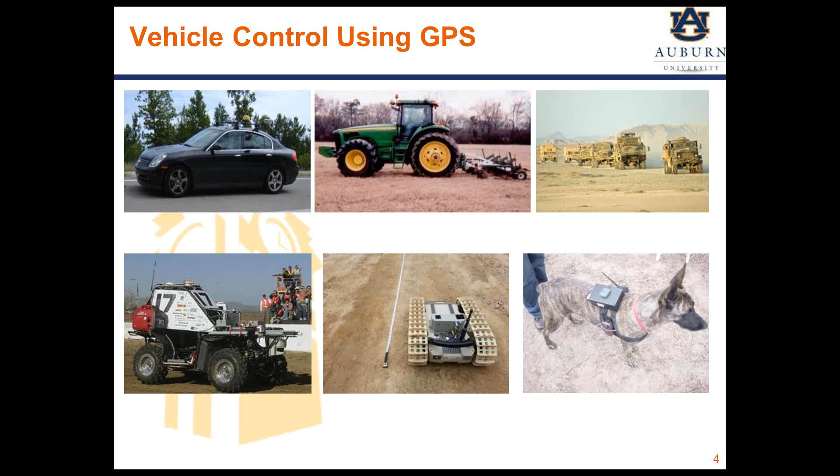And then, of course, the question is, what's the next vehicle we're going to work on? And so we've actually, in the past, and this has been getting a lot of publicity lately, done work with an autonomous canine. So the vet school trained a canine to be able to listen to commands, and we basically put a GPS receiver pack and a smart controller that we program to be able to send the dog to waypoints. So you can imagine things like border security or search and rescue or searching an area remotely without an operator. You could use a device like this.

So one of the other things that I'm really proud about our group is we don't do research just for doing research. We are in an academic setting, but we're a very, very applied lab, and so really proud about the fact that a lot of our work gets integrated into systems. So when we were working with the FCS folks, a lot of our algorithms were being integrated into the autonomous navigation software with GDRS. Some of those algorithms now are being integrated into Lockheed Martin, into what was called the CAST program. It's now AMAS. And so they've taken our software and integrated it into their platforms.

Some of our vehicle modeling has made it into different simulation environments. Deere is currently testing our control algorithms and basically forcing us to write them in a way that they can integrate them easily into their vehicles at future points. And even work that we've done with OEMs like Ford, they've basically taken our algorithms and at least tested them, so they're not necessarily inserted in current production vehicles, but they have tested them on their own vehicles.

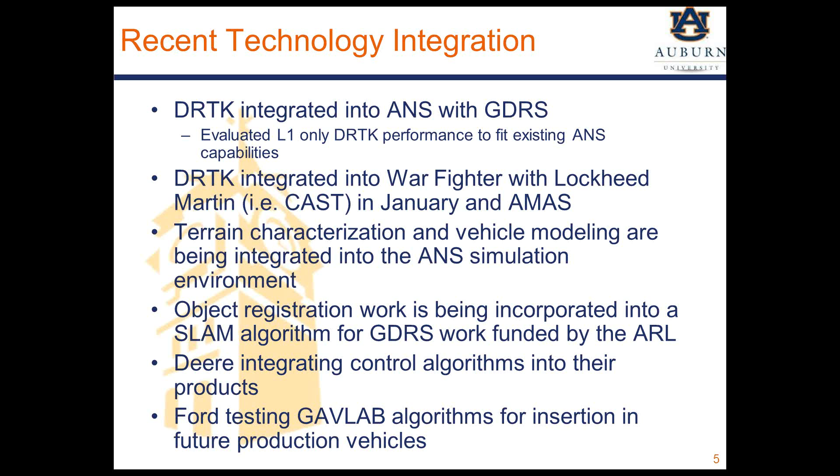Some of the resources in our lab: we have a variety of different GPS receivers, including standard hardware GPS receivers, but we also have a lot of specialized software receivers. So we have a NordNav IF recorder and software receiver that lets us record L1 IF data. We can record that data and replay it through the receiver. We can replay it through our own. We have our own C and MATLAB software receiver algorithms that we can play that IF data through. We're also building up our own FPGA-based IF and IMU recorders so that the IMU and IF data is time synced.

And then we've developed some FPGA reprogrammable GPS receivers and we're in the process of moving those to real time. And so that allows us to collect IF data, develop new tracking algorithms, and see how they perform in different environments, such as noisy environments. We're supposed to go out in 2 weeks to White Sands for what's called NavFest to collect data in different jamming environments. That currently is on hold due to the current government situation, so it may be rescheduled till December. But we'll take these IF recorders, record data in those environments, process that data and see if we can develop algorithms that can improve their performance in various scenarios.

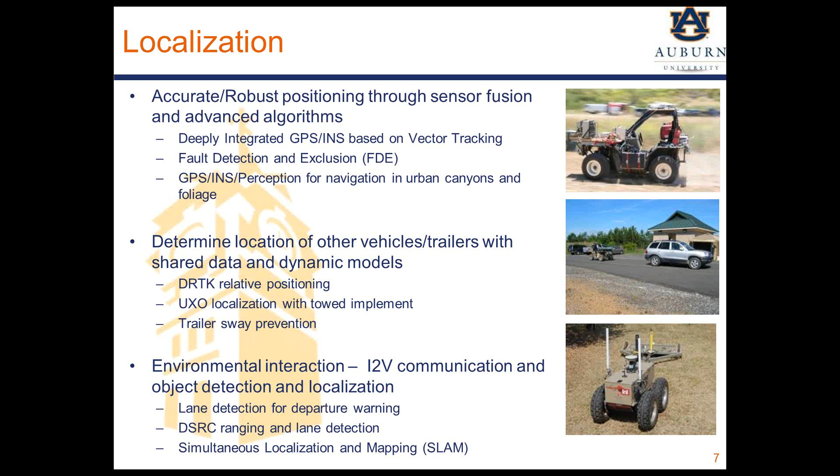And then even some environmental localization, such as simultaneous localization and mapping, where you're looking for objects, mapping those objects, and then navigating off of those objects. So this is work that we're doing for GPS denied or GPS harsh or GPS limited environments.

So one of the things that we're developing in the lab is what we call a GPS simulator. So on the market you can buy RF simulators. This is not an RF simulator at present. It's what we call a GPS simulator because it simulates GPS outputs. So instead of providing RF outputs, it provides NMEA messages or range and pseudo-range measurements, just like a receiver would be. And so we use it in the lab for several of our programs where we want to basically simulate a different receiver that's hooked up to a module.

And so within that, we have realistic acquisition times. We have noise values. We can put in building models, so we can look in a certain environment and say what satellites would be available this time of day at this location, given these buildings located around me. So you can put in 3D models of the environment and determine which satellites are available.

And then we're in the process of trying to use one of these software-defined radios to see if we can take that and then actually turn it into a low-cost RF simulator. TARDEC actually is interested in this for hardware-in-the-loop testing, and so we're in the process of seeing if we can turn this GPS simulator, run it through the USRP software-defined radio, and turn it into a low-cost RF simulator. And so that's current work in process.

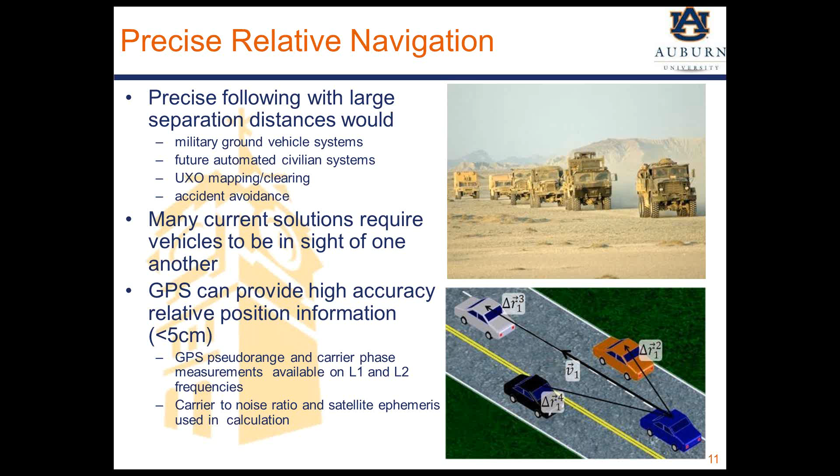The cartoon on the bottom is basically a drawing of how I could use this in automotive applications to be aware of my surroundings and where the vehicles are: if I have a vehicle that's heading towards me, is that vehicle in my lane or in a different lane, and so on.

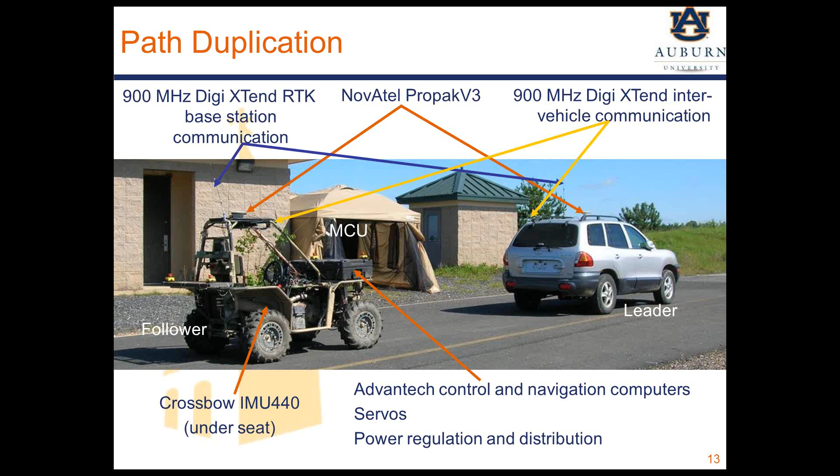We've tested this also here at Auburn University using a couple of our test vehicles. You see here a lead vehicle, which is a Santa Fe. It's driven by a human. It has a GPS receiver on it and a radio. Data is broadcast to a following vehicle, one of our by-wire vehicles, an ATV. It takes that data, processes a relative vector between the leader and follower, and integrates that with an IMU located on there to allow automated path following.

What you're going to see here is a test. These are two different tests run at two different camera angles. There's a person in the following vehicle controlling the throttle, so you can think of it as the person controlling the following distance. The actual lateral control, the steering, is all being done autonomously based on these relative position algorithms to follow the vehicle path.

The following distance can be automated as well. We have another program to look at that. But for this, we were really just looking at the path following capabilities, so we'd have the driver control the throttle, but not the steering.

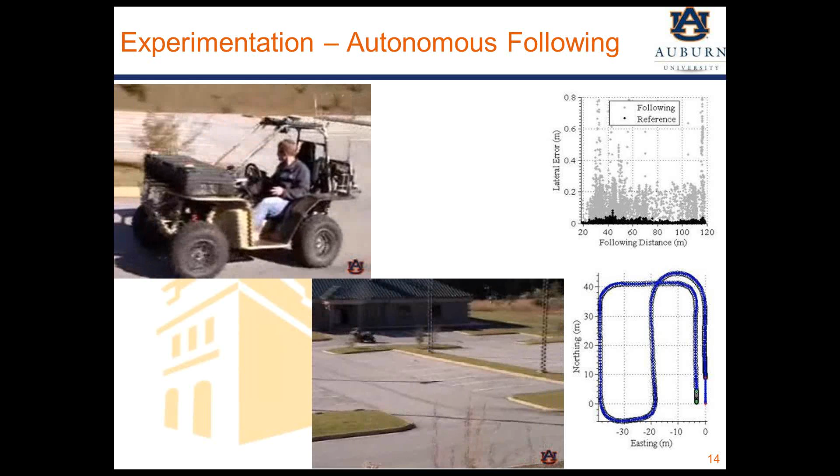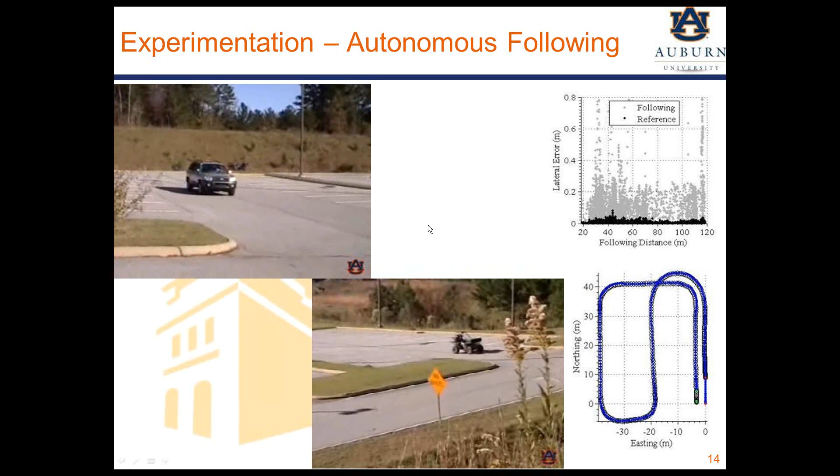I'm going to bring this top left figure back again. You'll notice where the Santa Fe crosses this path, you can make a note of the location, and then you'll see the other vehicle pass that same location. We're not driving directly to it, so we don't cut corners. We're following the path, so we keep a database of the past relative vectors between the vehicles. As that vehicle passed by, hopefully you can see he had the laptop in his hands, but he wasn't controlling the steering. The steering was completely automated. I'll let the video continue to play out.

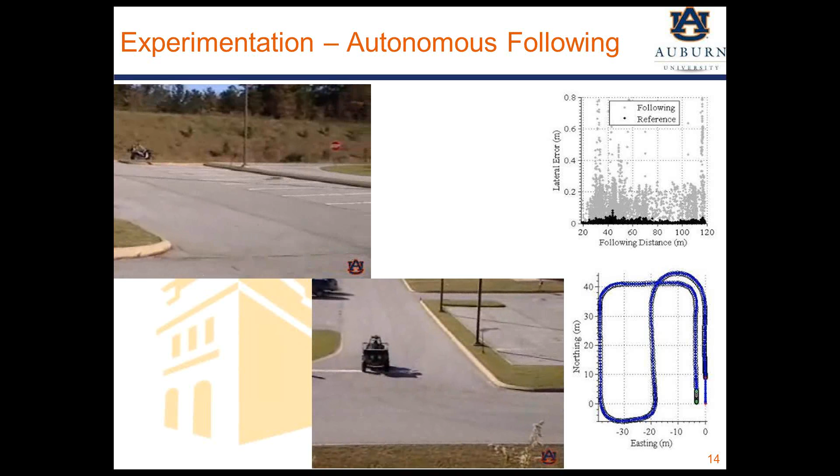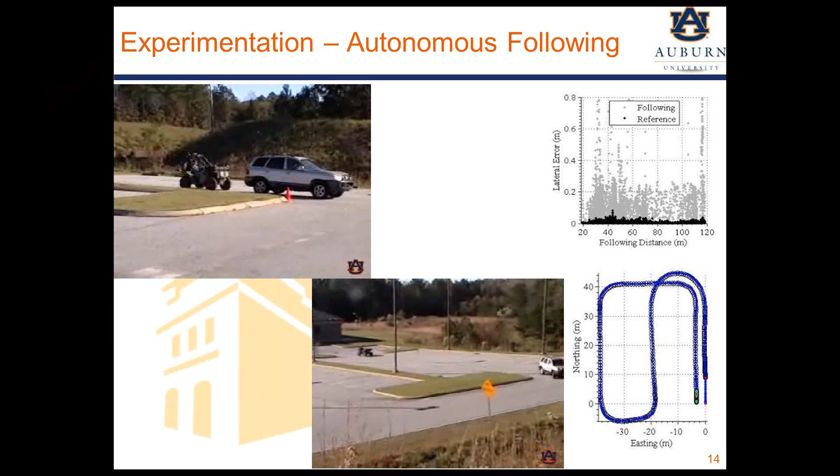On the right, you see some of the error data. Dark black is our navigation positional error. The gray is the following error, so the gray is really a combination of the black and our control algorithm. The purpose of this really was the navigation aspect, so we didn't focus too much on tightening down the actual control aspect. We really cared about what those dark black dots were doing.

All right. Not sure how to make this go away. Vicki, is it on? What are you trying to get to go away? So on my screen, something popped up. Maybe it's not showing up on yours. The GoToWebinar thing popped up. No, I don't see it on mine. All right, I'll just ignore it, and hopefully it's not covering up anything I need to see. No, we don't see it.

All right. So moving on to some of our multi-sensor fusion for navigation, and this is work that we've been doing primarily for Federal Highway, but also has military aspects. And the idea is to fuse all the sensors that are available on a vehicle in an intelligent way to improve the positioning robustness.

And so vehicles that are coming off the OEM's markets right now, especially the high-end vehicles, but it's going to start to find its way on lower-end vehicles, come with navigation systems, so that means they have a GPS receiver, and come with electronic stability control. That's actually mandatory in the U.S. now, so that means there's some subset of inertial sensors, accelerometers and gyroscopes, and wheel odometry measurements.

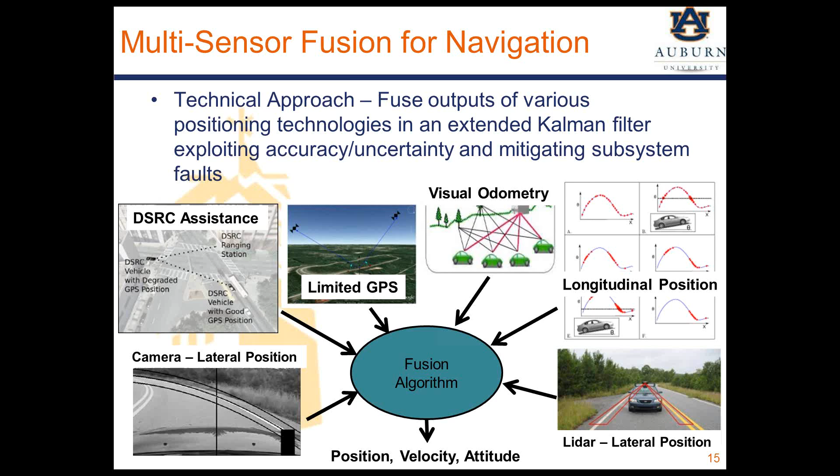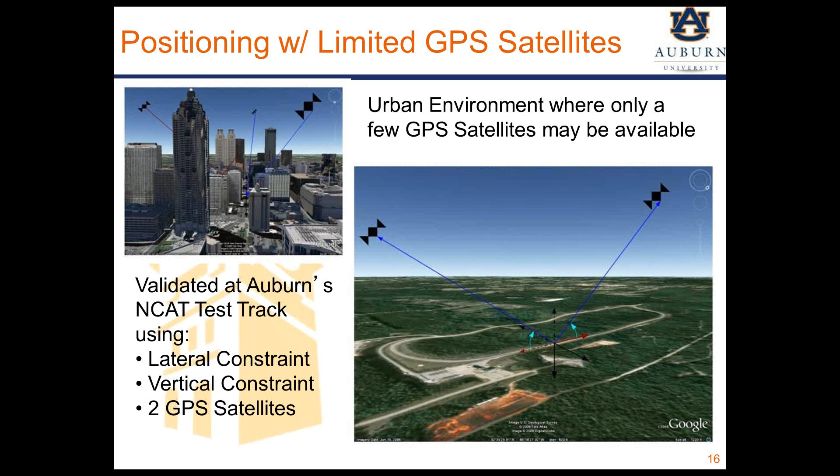And one of the things that came out of that was the ability to do vehicle navigation with just 2 GPS satellites. Typically you require 4 GPS satellites to determine your position, but we showed that you could add a couple of constraints with a map database. You can add a vertical constraint with the map database, and with the camera that's looking at the lane markings you add a lateral constraint. And so with those 2 constraints, now you can determine your position with just 2 GPS satellites, which is very beneficial in an urban environment where you have buildings blocking GPS satellites.

One of the things people usually see is there seems to be a latency between the filter solution and the RTK solution. It's just the way we were fusing the data and the time syncs. Some data was on certain computers and some data on another computer. So some of that latency you see as we drive on our test track is not true latency. It's just the way we've got the setup running.

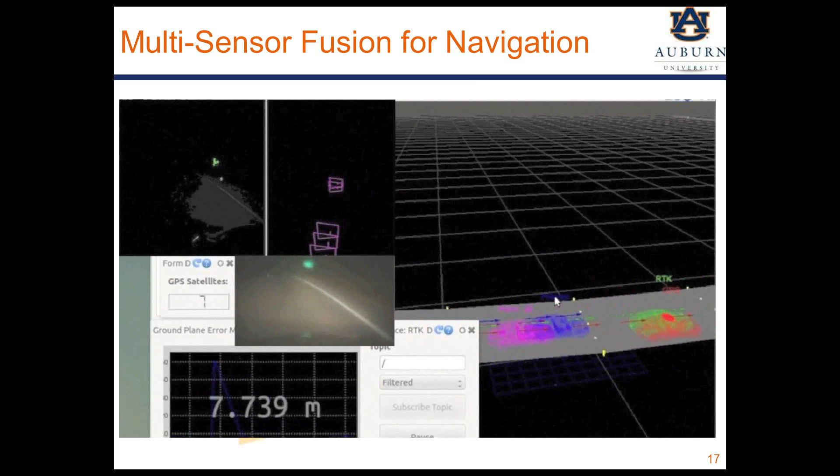On our GPS signal processing, we've started doing a lot of work in deeply integrated GPS INS, or vector tracking, where you're integrating all of the signal measurements in a single common filter. Instead of having individual tracking loops, you take all the correlator outputs and combine them in a single filter. You predict what those correlator outputs should be at the next time step, then look at the error between your prediction and the actual and correct based on that.

The advantage is that it provides near instantaneous signal reacquisition after short GPS blockages. It also provides improved immunity to noise, i.e. jamming or foliage.

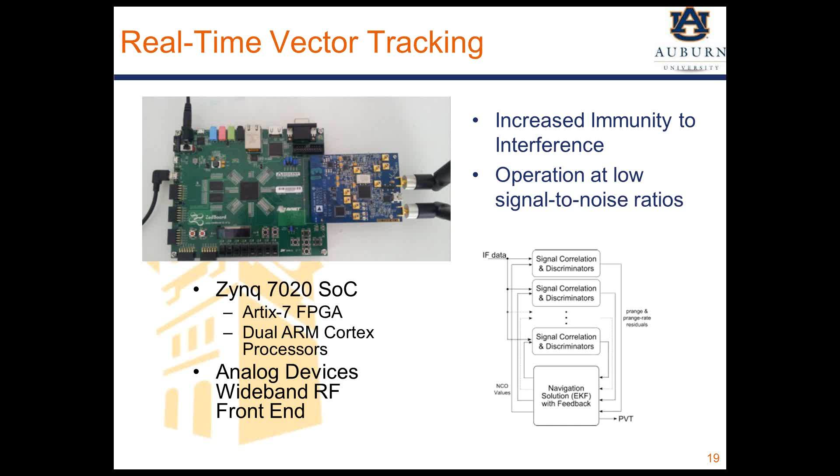As I mentioned, we're trying to move that to real-time vector tracking, and so we've looked at a new board, basically it's an FPGA with an ARM processor called the Zynq board. And so the idea is we'll do the correlators on the FPGA, and then we'll do the sensor fusion Kalman filter algorithm on the ARM processors. We're currently using an off-the-shelf wideband front end, but we're looking at making our own specialized narrowband RF front end, so a typical GPS front end as part of that.

This is some work that we did for the Navy. They basically came to us because of our vehicle dynamic expertise and wanted to know if you could use some dynamic constraints to reduce the error growth from the inertial measurements, the IMU on a vehicle. So a lot of times vehicle constraints are made in vehicle navigation that basically say the vehicle can't slide laterally. Another way to say that is there's no lateral velocity, or the wheels don't slip laterally, or in vehicle terms it's known as side slip.

And so what we did is we looked at different grades of IMUs and used vehicle models to see when using that vehicle constraint was advantageous and when it was actually bad to do. And so we did a whole series of simulation tests. I'm just going to show one of the experimental tests where we took a vehicle. It had an HG IMU on it. We had RTK GPS positions for our truth, but they weren't used in the algorithm. So the algorithm was only using the IMU measurements and these vehicle dynamic constraints.

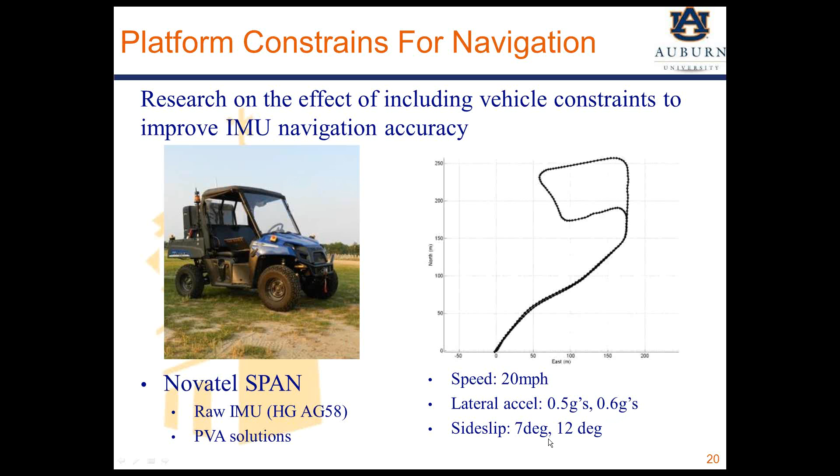And on the right, you can see the path that we drove. So we basically drove in a field, started here at the bottom left, drove up, kind of did a circle. And the reason for this circle is we did some pretty aggressive turns where the vehicle is generating 0.5, 0.6 Gs of lateral acceleration, so fairly aggressive turns. And it's actually sliding, generating 7 to 12 degrees of side slip.

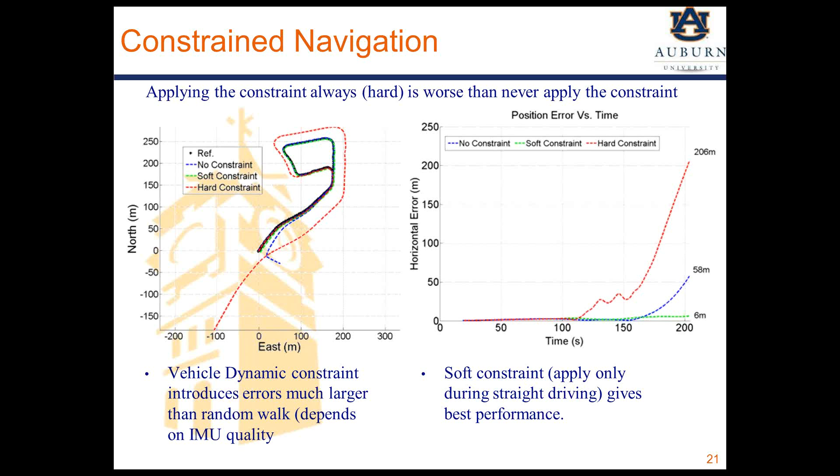So we've also done some work in indoor navigation where we looked at mapping an environment and navigating without GPS using, as I mentioned earlier, simultaneous localization and mapping. So we're using wheel encoders, a LiDAR, and an IMU.

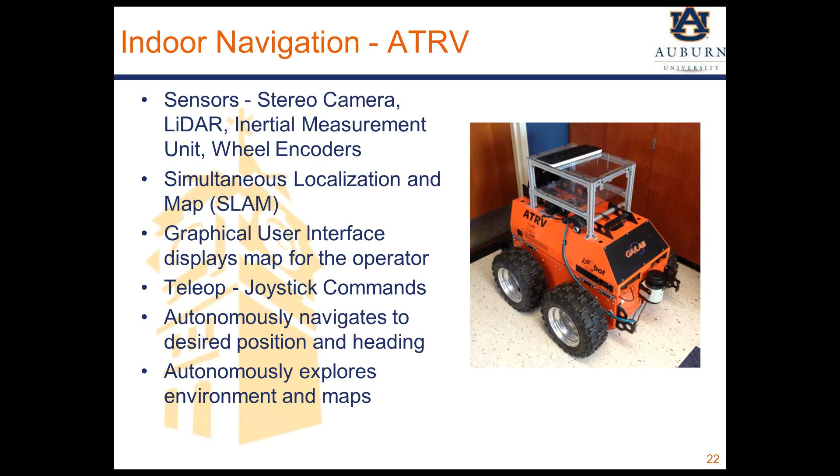And we're driving this vehicle by teleop, and the main focus of this work was actually to build a display for a user. So I'll run this video here in a minute, but in the bottom right is the view from the camera that's on the vehicle. And so a lot of times there's a single camera mounted on the front of the vehicle that an operator is having to drive the vehicle from.

And in a lot of scenarios, it's advantageous to be able to generate kind of a different view, an overhead view, if you will. And so what we did with this work is as we're doing our mapping of the environment, we build that map into a database and then allow a user to use the database to generate virtual views from anywhere they want.

And so if you can imagine when I'm going around a corner, if I'm trying to go around an obstacle and I want to know when I've cleared that obstacle, I can use the sensors on the vehicle to build a map of where that obstacle is and then allow the operator to view it from above, have a bird's eye view.

Here on the right is just a camera of someone following the vehicle. So this would just give you information about what the environment looks like. So again, the bottom right is the camera view that the operator would have with only the camera. This is the view of just someone following the vehicle. And then on the left is our generated view.

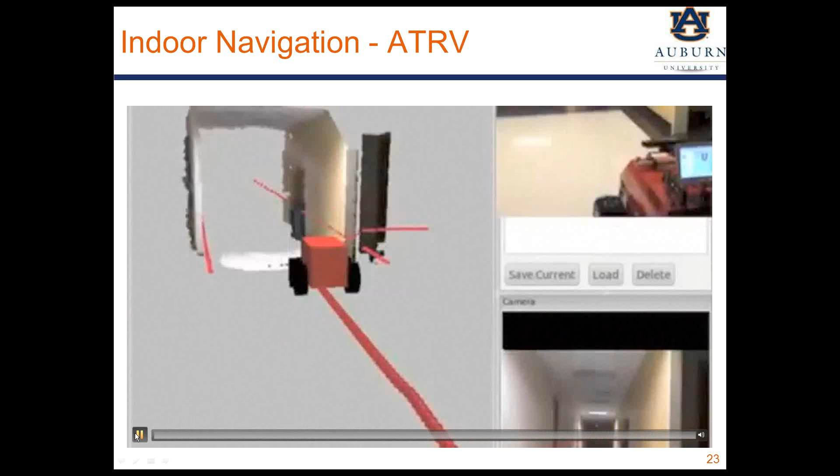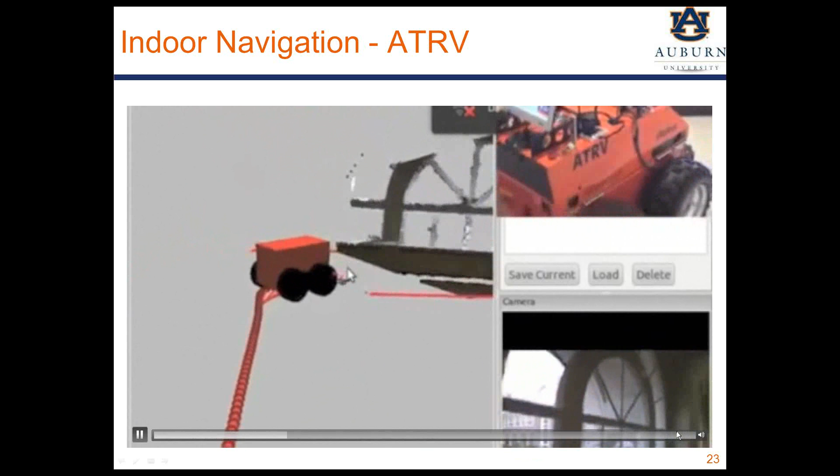And you'll see in a minute it'll go around the corner and the operator will actually kind of change his, turn that off. You'll see him change his perspective on how he wants to look at the environment that he's driving on.

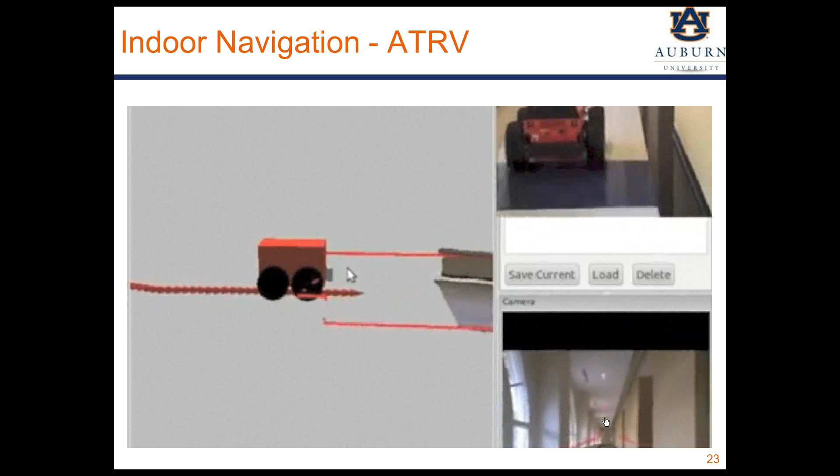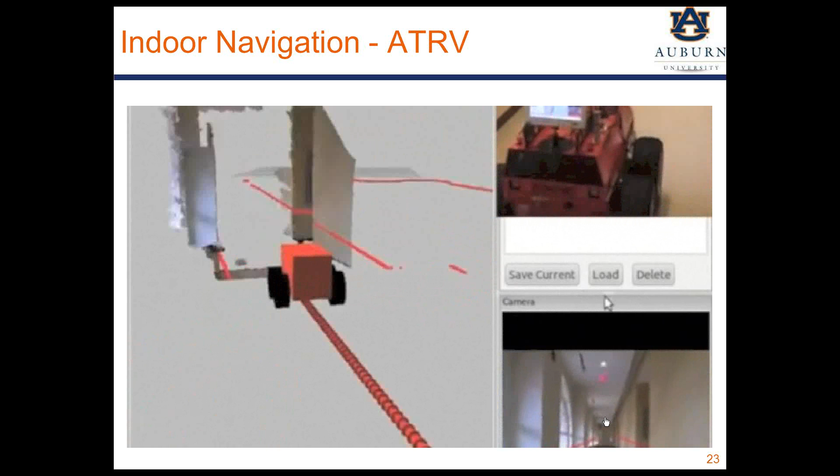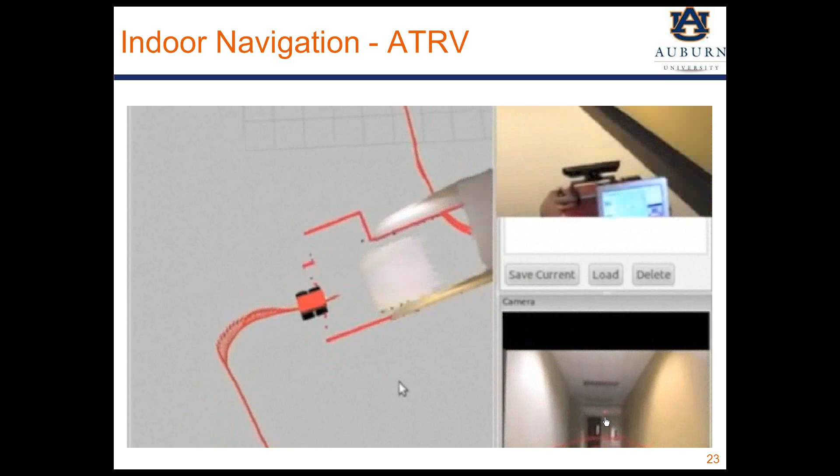So there he's rotated it, kind of put the view to be a little bit above and back, and now he's rotated again, and now there's the bird's eye view. He's driving around the environment. So really still using our navigation research, but then using it basically to provide other enhanced capabilities.

Talk a little bit more about vehicle dynamic work. We've done some vehicle work with Ford where we were estimating this parameter that I mentioned earlier called side slip, which is a critical parameter for electronic stability control systems, and it's simply a measure of how much lateral velocity you have at the vehicle.

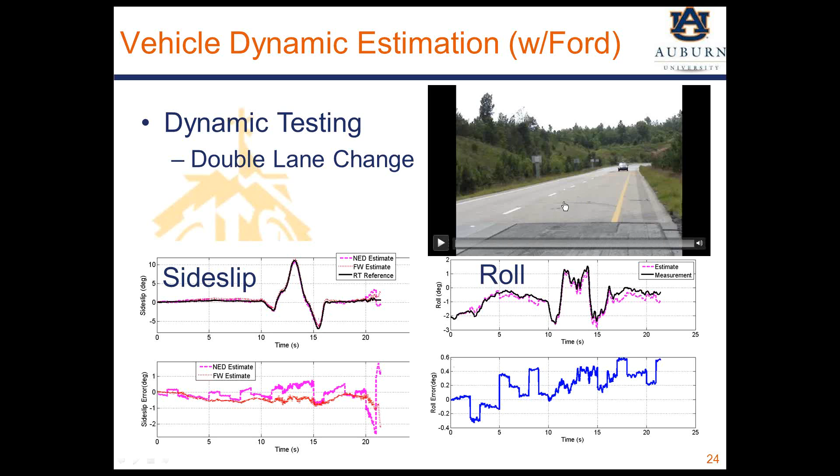And I always like to show, so this is a double lane change maneuver. This is kind of what it looks like. So this is our test track that I mentioned earlier. I'll play the video again so you can see that vehicle during an aggressive maneuver, sliding sideways.

And so I get asked a lot of times where we get our professional drivers. And so that's one of the advantages of having 20 graduate students in the lab, they're a little bit expendable, so you can have them go out and run some of these crazy tests.

I'll kind of close with a mention of the DARPA Grand Challenge. This is pretty old work, but it really is a culmination of everything we do. So it involves navigation, sensor fusion, and vehicle control. And these are, if they'll play, just a couple of videos of our vehicles running.

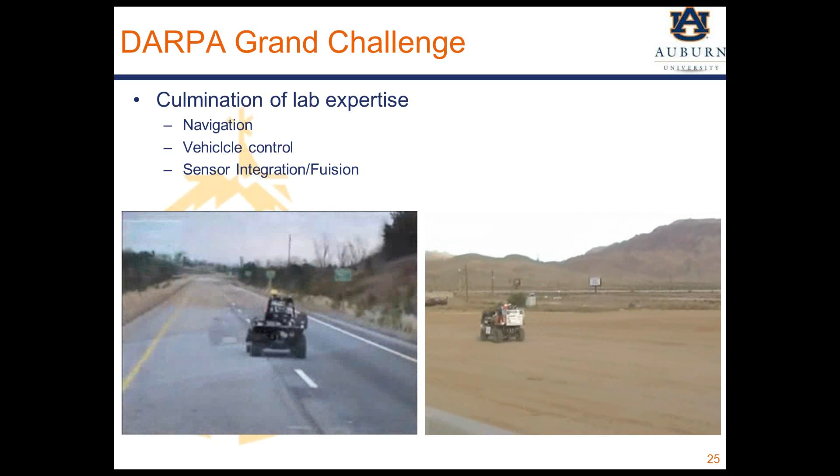I'll let the video on the right play for about a minute or so. This is actually, on the right, video from the actual competition, the desert competition.